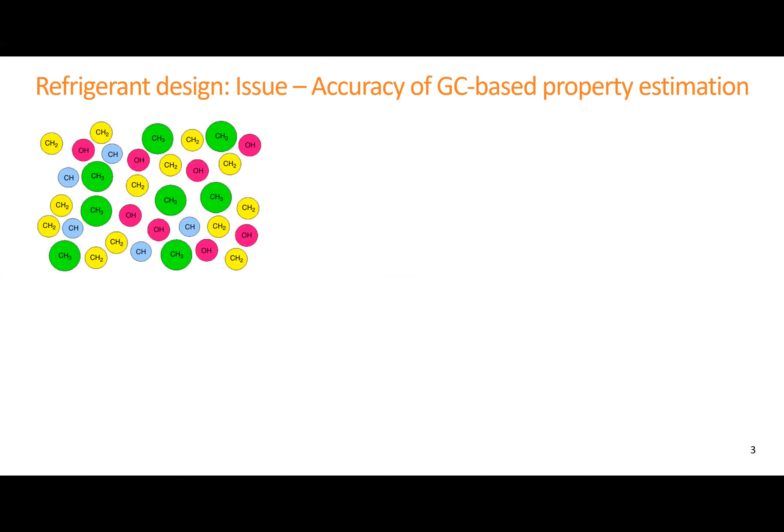As I said earlier, these are the groups that can be joined together to form molecules. Our view is that these groups are a little bit too big to make the small refrigerant molecules. One would just take those groups together and join them in terms of the free bonds of each of those groups, and then a molecule should not have any free bonds. With the groups that are available currently, those small molecules with chlorine, fluorine, or mainly fluorine, carbon and hydrogen are not possible to make.

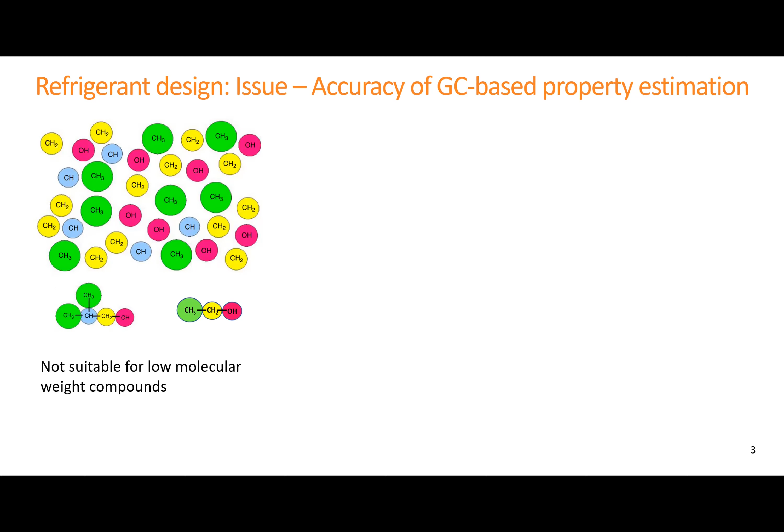And global warming, as I also said, actually depends on the data. If people have measured and have good confidence about them, then yes, we can fit them very nicely. But I'm not 100% sure of the global warming potential as well as the toxicity measures. There is big difference in the values, but we are not talking about very accurate values in terms of these properties. We are talking about that as long as we are below a threshold, it is all right.

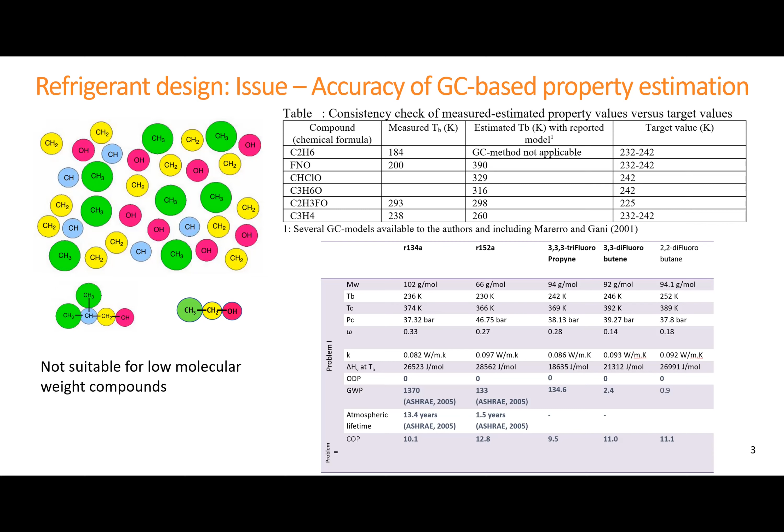So we started checking, or creating a new database of molecules. And when we checked the current database, as I said, there are not that many molecules. There are only 300 known refrigerants, and they're not wide enough for us to use them to develop new models and accurate models. And even for the 300 refrigerants, not all properties are measured for them.

So what we did was, as you can see here, with 1 carbon, 2 carbon, 3 carbon, 4 carbon, and then the bonds are listed. One carbon will have 4 bonds. And then we try to fill those 4 bonds with hydrogen, fluorine, chlorine, amine, OH, iodine, to see how many molecules we could generate. So examples, CH4, we fill all the 4 bonds with hydrogen, and then CH3F, CH2F2, like that. We manually did all of this. We did not use machine learning because we would have to create a program that the machine would understand. That would require more effort than just us doing it manually.

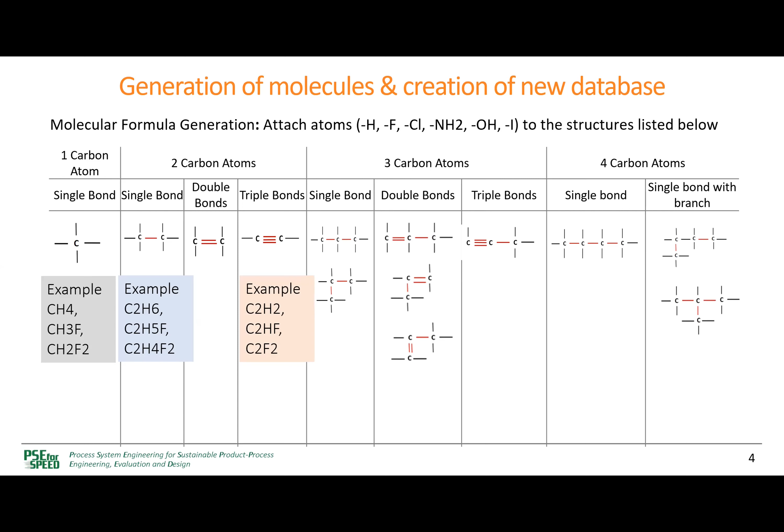So like that, we filled out all the bonds, all the combinations for single carbon, 2 carbon, triple bonds. I'm not showing examples for all of them, but all possible combinations, we looked at them, and we generated the molecules. This gave us a new database.

And then the new database, you can see with 1 carbon, 2 carbon, if you can see my cursor, the first column here has 8,000 compounds. These 8,000 compounds, we are sure it satisfies the chemistry rules, but they don't exist. What we have found is these molecules, around 3,500, they do exist, but properties are not found for them. Out of these, only 364 were found in our current database, which had property values. And another 65 had the same chemical formula in terms of atoms, but had different structure.

So this was the number of molecules for which we had data. These molecules exist, but data is, we are trying to collect data for them. They don't exist, these ones. In other databases, not exactly these compounds that we have generated, but small 1 carbon, 2 carbon kind of compounds, we found about 1,300 compounds. So then we created a database.

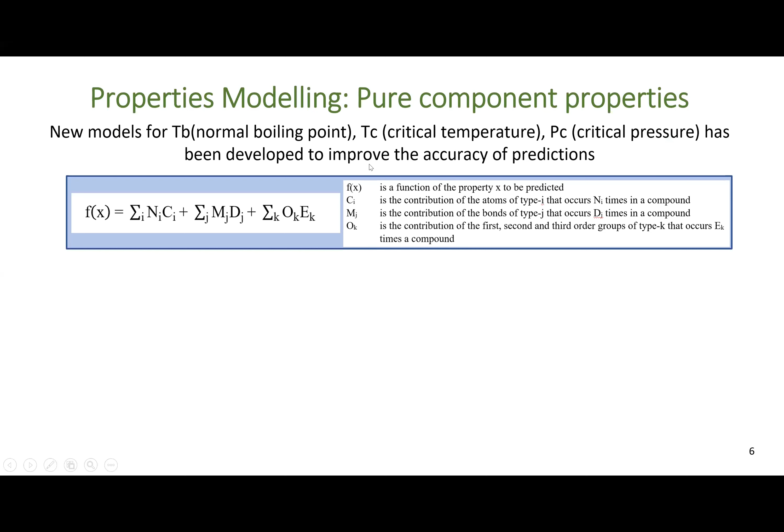So the new property models, we did the model for boiling point, critical temperature, critical pressure. The model looks the same as before, except that we have a different set of groups. And now we are able to get much better error.

Before we got so much error. We got mostly errors within plus minus 10%, but we needed plus minus 1% and 5%.

Now we have improved that, but we need even better than plus minus 5%, because if a boiling point is 210, 10% means 21 degrees plus minus. That is too much. We need to have within 1%, otherwise the simulation and performance is not going to be very accurate. So we still need to improve here to get it to 1%, but at least we have 5%.

And it's much better than what was before. So that's a new improvement.

But as I said, if one wants to use these groups and these methods, the generation of the molecule is already done because we have all the molecules. So all we need to do is calculate the properties.

But we have the model now. So what we need to do is go back here and calculate all these properties. We would not have the possibility to check how accurate they are, but at least we have a model to predict the properties.

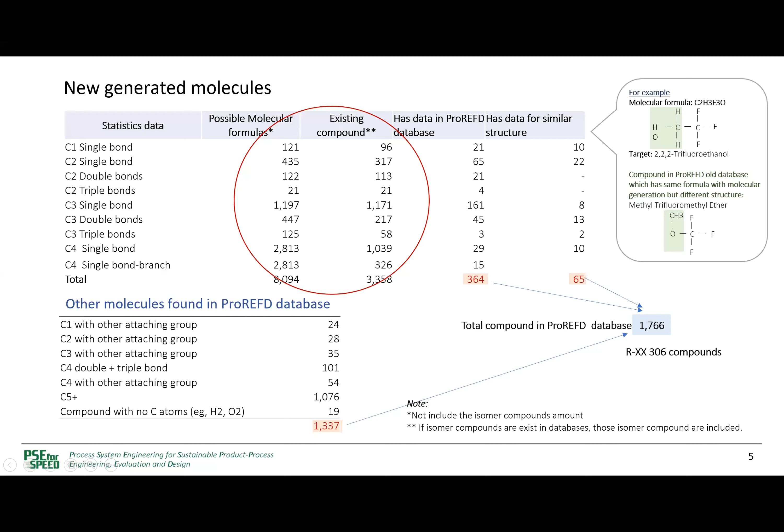And also we can find out exactly which molecules have larger than 10% error. Maybe the groups that we had defined, these small groups, were not good for these. So we are looking at how to avoid them and remove them. Or maybe there is an outlier. We need to check those.

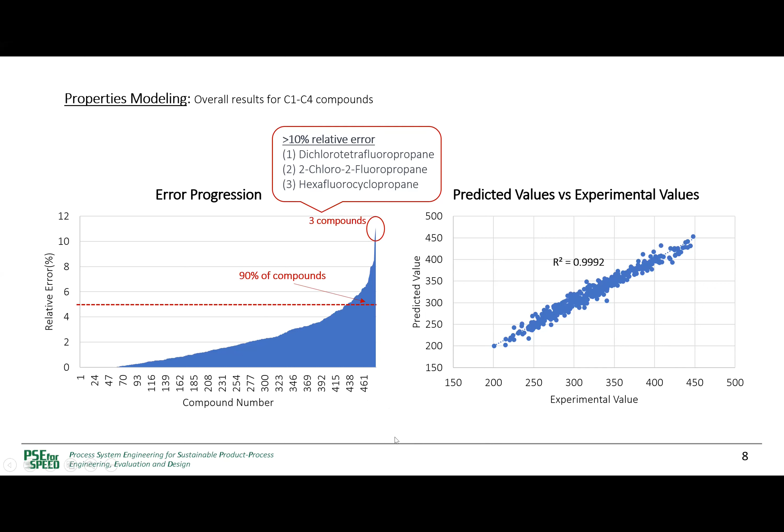And you can see that the number of compounds is not 1,000, it's less, because this is compound C1 to C4. So when we did the modeling, we reduced the compounds further to 1,016 because some of the larger compounds worked all right for the groups that we had.

So we are talking about two parallel methods now. One, the standard group contribution method, and one specialized group contribution method only for the refrigerant molecules.

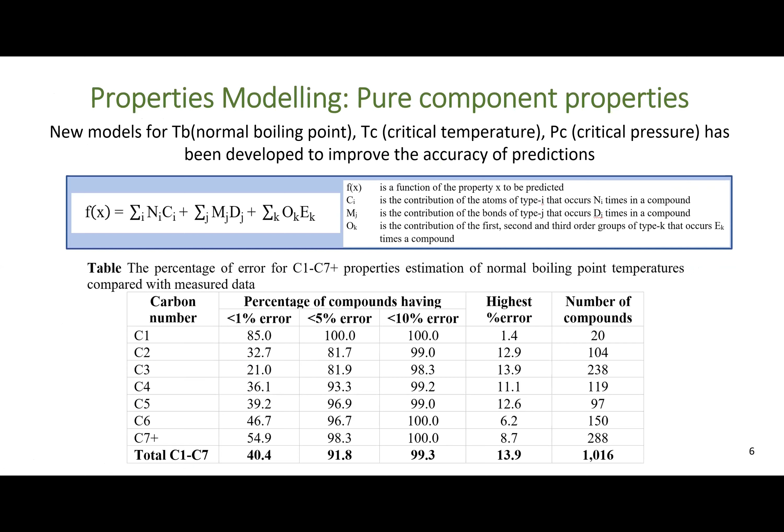So now we have the pure compound, but we are also going to look at mixtures because refrigerants as mixtures have been proposed. And the reason for that is if we want to satisfy several properties, it's unlikely that one molecule will satisfy all those properties. If we take mixtures, it has more chance of matching more than one property. So that's why mixture properties is very important.

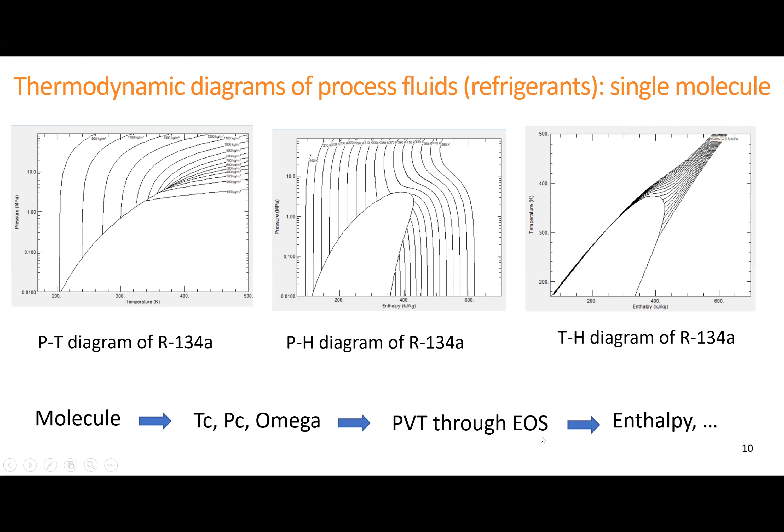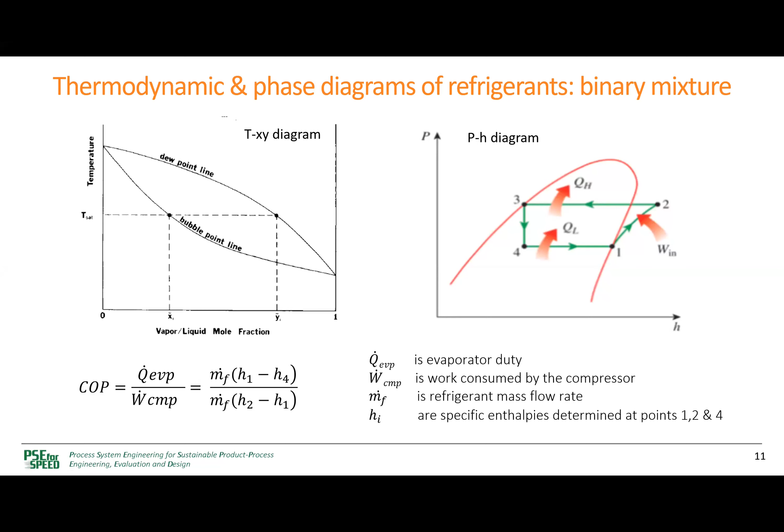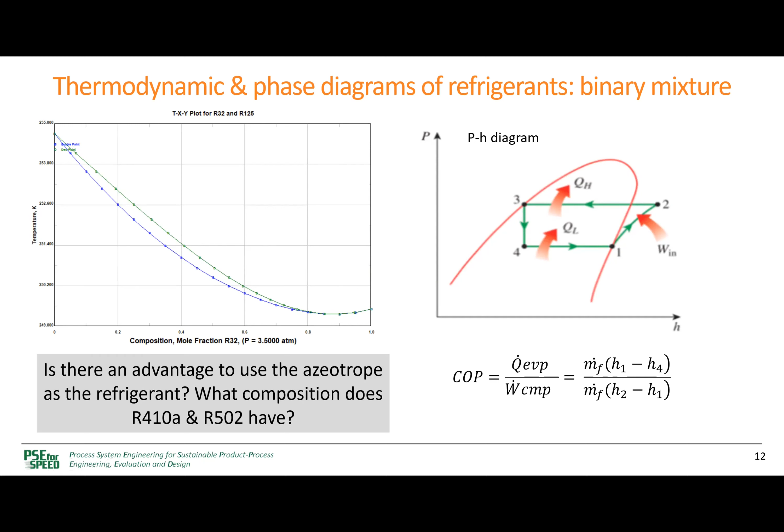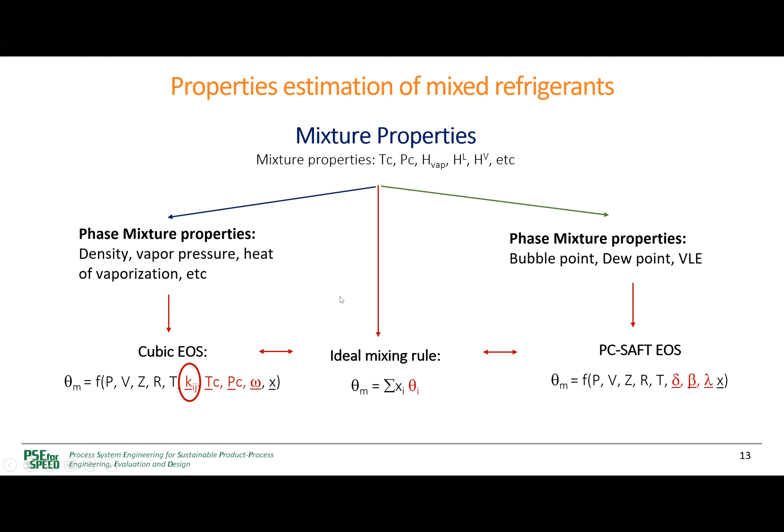If R, T, and P are given, VZ can be combined into one variable, and this can be predicted, and similarly here. Once they are predicted, the fugacity coefficients can be calculated, and dew point, bubble point, VLE, all of those can be calculated. Similarly for the density, vapor pressure, heat of vaporization, etc. So an additional complication is added when we want to handle mixtures.

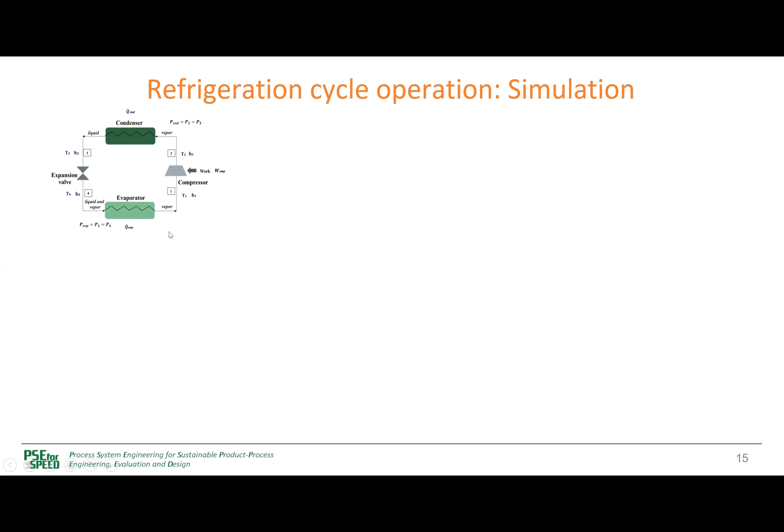So now simulation and sensitivity analysis. This is the cycle we want to simulate. We can choose whether it is a single refrigerant or binary, ternary, quaternary, quinary - so up to a 5 compound mixture can be handled by the model we have developed, because we calculate the PVT relationship and related data for whether it is a single compound or any mixture like that.

So step 1, you define the mixture. Step 2, give the composition and the mass fraction, mole fraction, all of that, and the formula.

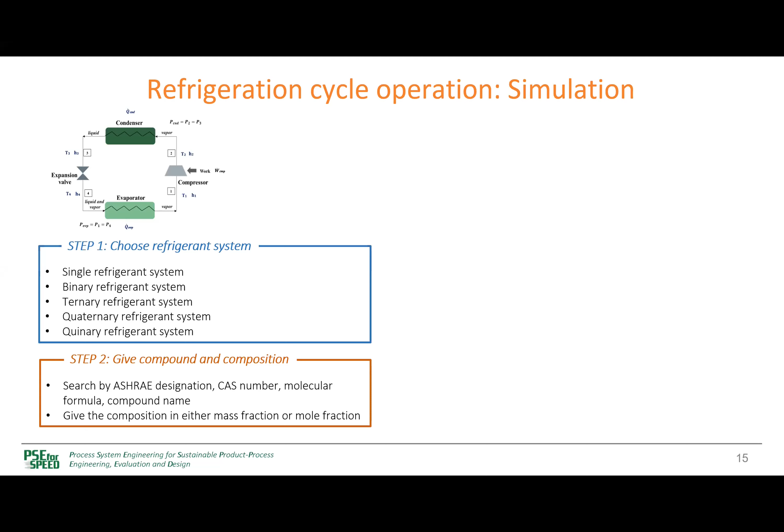Then the system will extract all the data needed, all the parameters needed, and then it will give you options to define the condenser - do you want to define the temperature and calculate pressure, or define the pressure and calculate temperature? These options are possible. Expansion, constant enthalpy, and other options are also possible. So then the user has to select those.

Based on the selection, the program will calculate the temperature, pressure, whatever is needed to calculate the enthalpies, work, and the heat duties, and then the COP. The results can be exported to an Excel file or saved for future analysis.

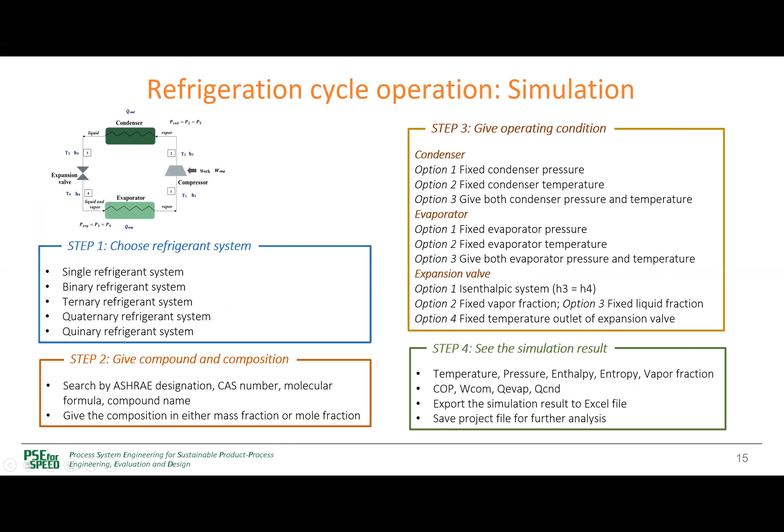It can also do sensitivity analysis, both of parameters as well as operating conditions. Parameters meaning that once we do step 4 and calculate the COP or the work or the duties, if we had plus or minus errors - let's say the uncertainty in the boiling point, critical temperature, critical pressure was plus or minus 5 to 10% - then how would the COP change? That kind of sensitivity analysis can be looked at, as well as what happens if I change the room temperature or the ambient temperature or the cooling water temperature, what will happen to the operation. So both can be looked at, and this is what we call sensitivity analysis.

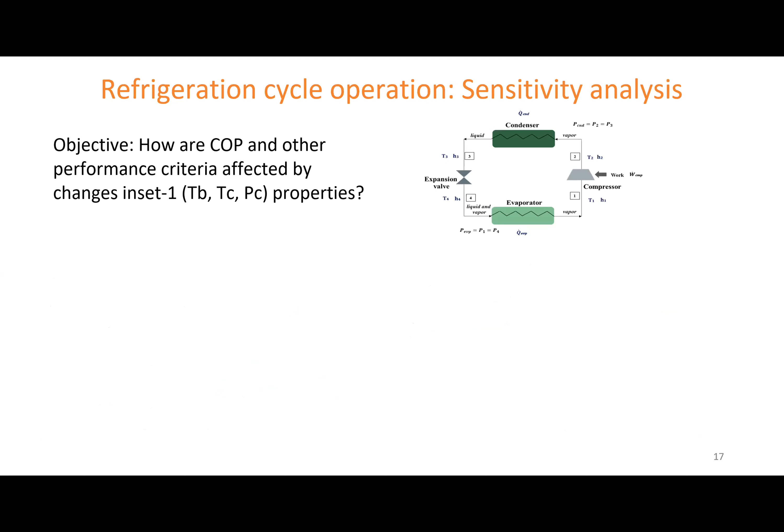So then, refrigerant selection - I'm not going through the models of the simulation because in lecture 1, I'd already given you how the enthalpy and the COP are calculated. So refrigerant selection: the objective is to find single compounds or mixtures that match a set of target properties and functions.

For a single compound, we will do a database search and CAMD that you have already seen. For mixtures, we will have to first identify a set of compounds which are candidates for the mixture, and then we will have to take different candidates and find out whether the compositions will match the target. Once they do, then we can select them for further analysis.

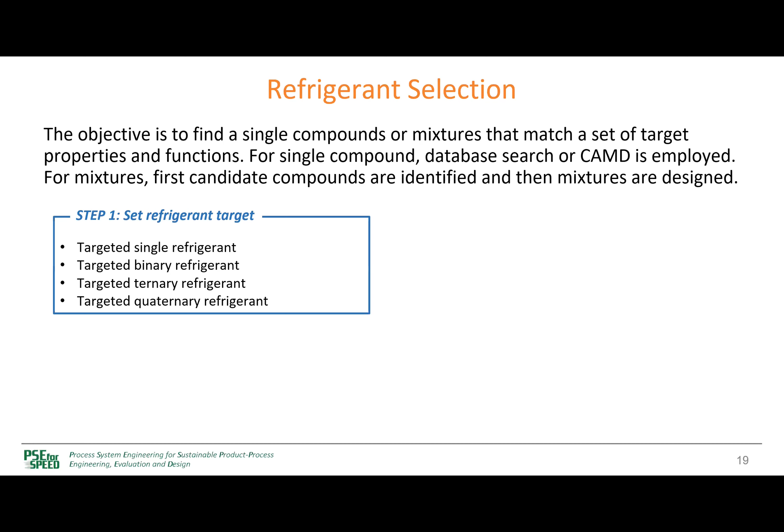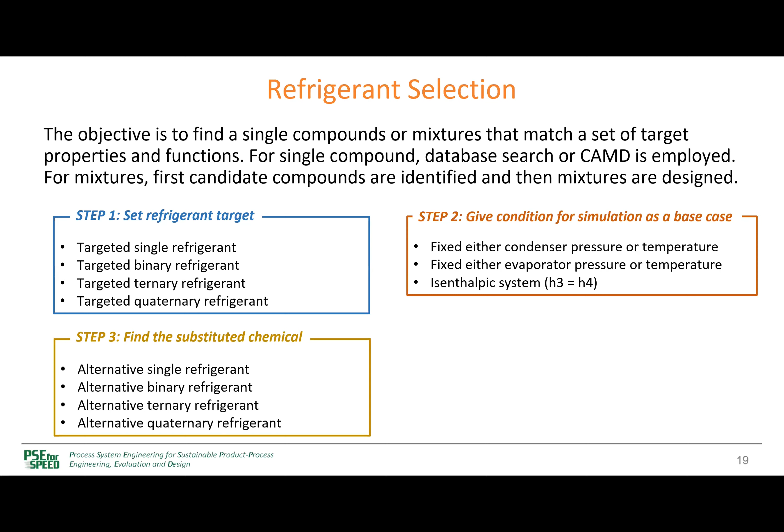In order to - I'm not showing now for the single compound, but this is also included - if we want to find a single refrigerant or a binary, ternary, quaternary, we have to set targets. Targets means what should be the property values. Then when we want to do the simulation, we have to choose the conditions for doing the simulation: what is the condition for the condenser, the evaporator, the isenthalpic expansion, and also for the compressor. Then we will find the alternative refrigerants, and you will see how it is done, and then we will do the calculations. So there are 4 steps.

So what kind of properties do we match? If it is a binary mixture, we have 2 compositions, but only 1 degree of freedom in the composition in terms of mole fraction, because X2 is 1 minus X1. Which means that if we take a binary mixture, then with composition, we can fit only 1 property - we can match exactly 1 target property. And since boiling point is the most sensitive property, we say if only 1 property needs to be matched, take boiling point.

If we want to have a ternary mixture, we have 2 degrees of freedom, so we can take 2 properties: boiling point and TC or PC. And if we have a quaternary mixture, then we have 3 properties: boiling point, TC, PC. Remember that we call this target property set 1, that we have to match these properties - TC, PC, omega. Omega is also not very sensitive, so we can ignore that.

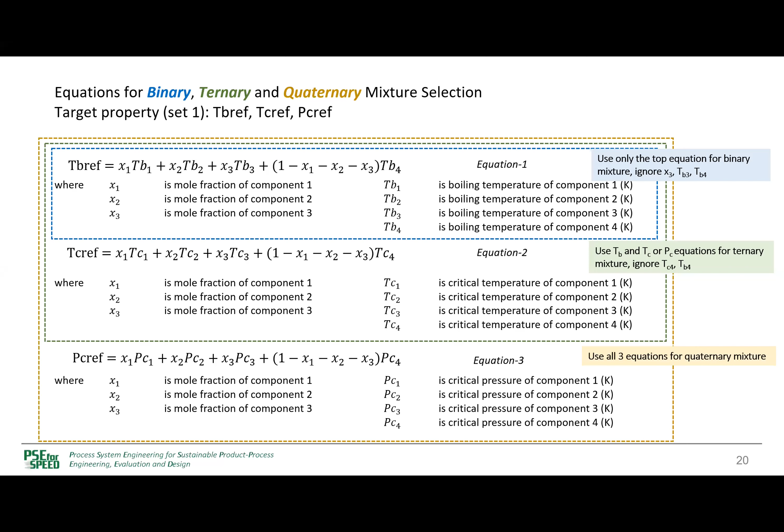If we define omega or critical pressure, we know what kind of PVT relationship we will get. That's why we say this set 1 target properties need to be matched with the mixture, and set 2 properties are global warming, ozone depletion, flammability, and all those things. Those are desirable properties, but not absolutely necessary—it would be good if those properties are good. So now I will show you with a case study.

Here we are replacing R143A, and we want to find single compound replacements, binary, ternary, quaternary. First, if we want to set up the target property mixture for boiling point, critical temperature, critical pressure, the equation is given. The R143A boiling point is 225, critical temperature 346, critical pressure 37. These are measured data, so we want to match exactly this.

If it is binary, we will match the boiling point. If it is ternary, boiling point and TC. If it is quaternary, we will match all three. And so the compositions we will get by matching this. Once we have compositions, we will calculate all the other properties and do the simulation.

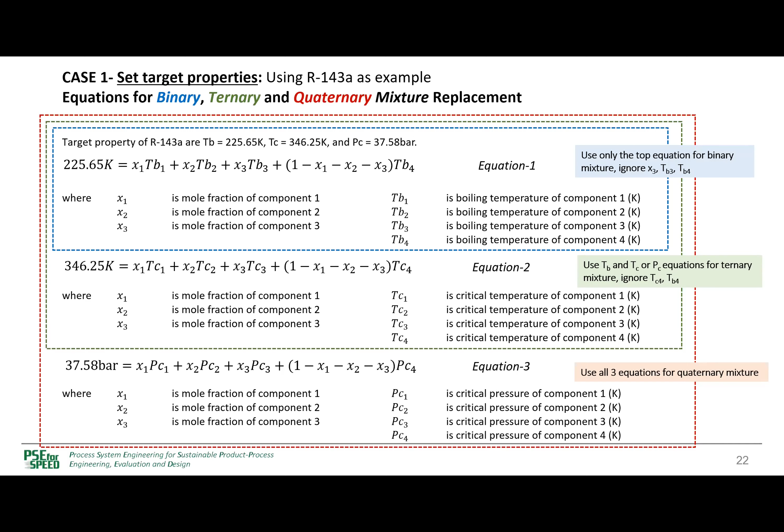The step in order to find the compounds, candidates, will already show you those things, and during the demonstration they will be showing you.

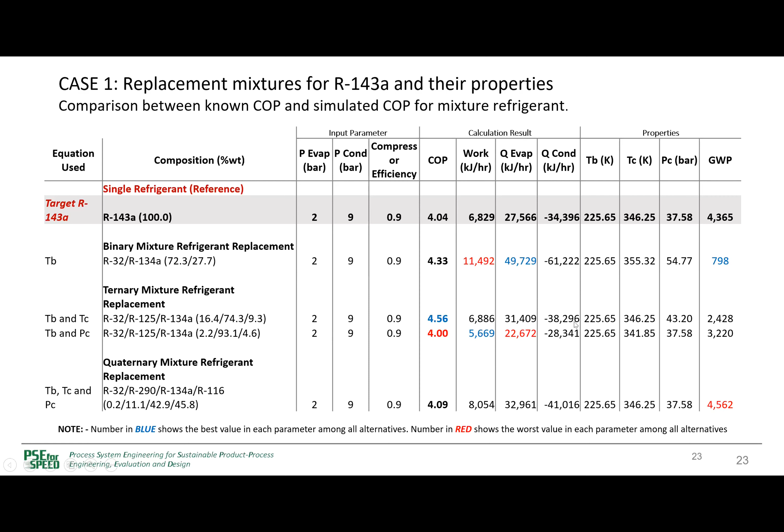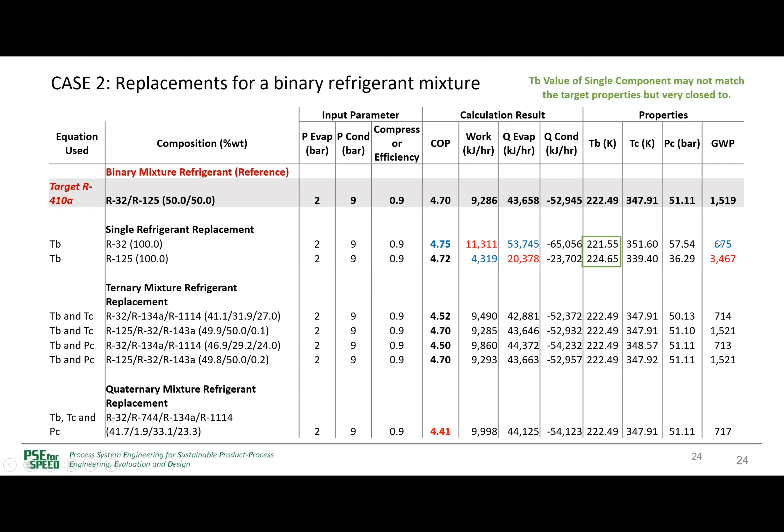The second example, case 2, is we have R410A, which at 83% forms an azeotrope, and at 50% it does not form an azeotrope. We want to replace it with a pure compound, single compound, ternary mixtures, or quaternary mixtures. It turns out that a single compound is quite good to replace this binary.

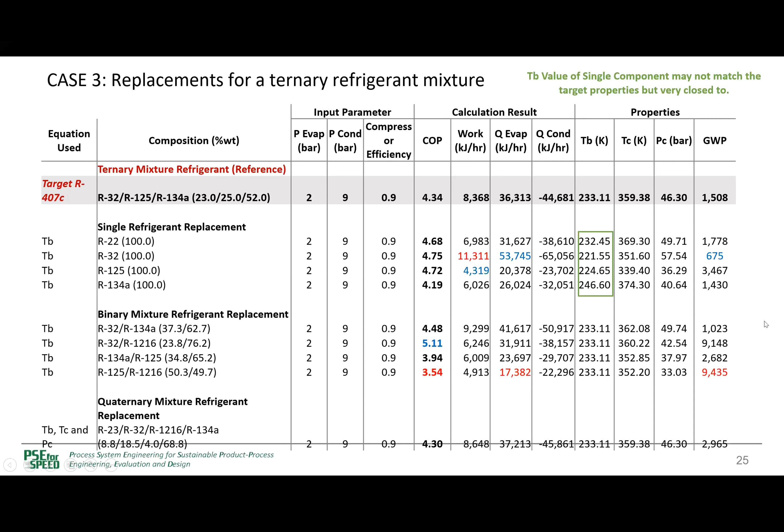The next one, we have a ternary target. Originally it is ternary. We have possible single compounds that can approximately give this, binary mixtures that can approximately give this, and quaternary. But you can see that this one, which has a good COP, the GWP is not good, while this binary is quite good, lower than this. But this one seems to be the best—just 32—seems to be quite good.

So again, what we can show is that it is possible to replace and find candidates that are worth looking at. More experiments need to be done, but these are compounds that exist. More experiments need to be done at those compositions to see if at certain composition and certain operating conditions they give the best results.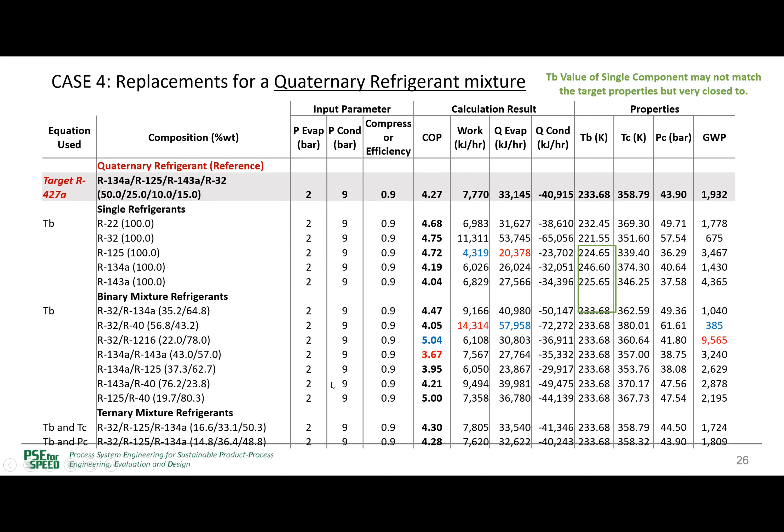The results are not shown here, but one can also take each of the best candidates and do sensitivity analysis - if the boiling point was different, from -5 to -15, or +5 to +15, keeping all other conditions the same, how would the performance change for boiling point, critical temperature, and critical pressure. The observation was the same: boiling point is more sensitive than TC, which is more sensitive than PC.

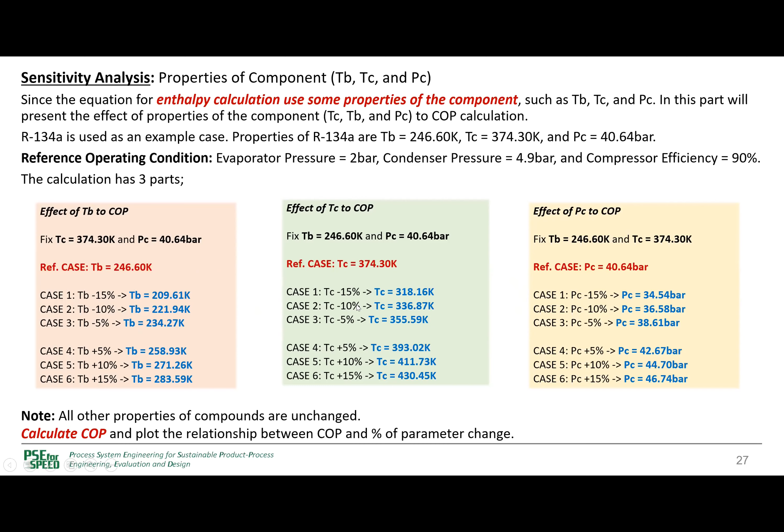If we increase the pressure, we actually get higher COP. So the expansion we do should not reduce the pressure too much - we should reduce it to a certain value. Compared to the base case, if we reduce it a little lower we get a better value, but we should not decrease so much. There will be a lowest value of the pressure, and we should keep it a little higher. So when we reduce the pressure in the expansion, we should not reduce too much - that's the message, and that will give higher COP.

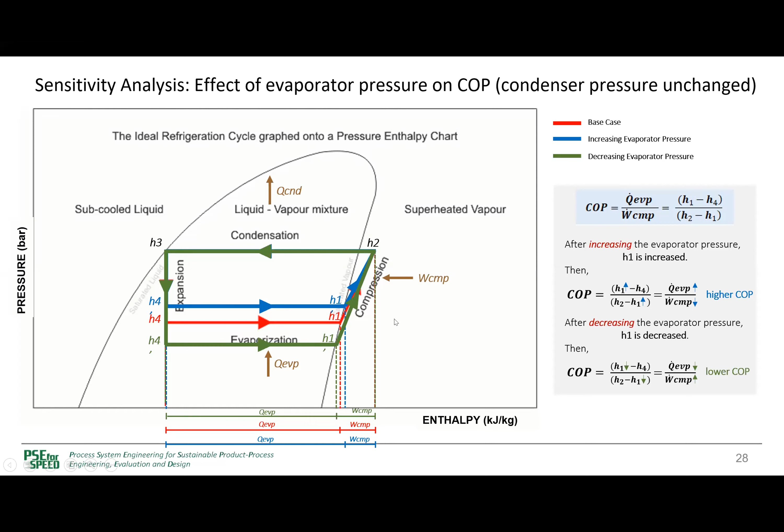So this kind of analysis can be done very easily on any candidate.

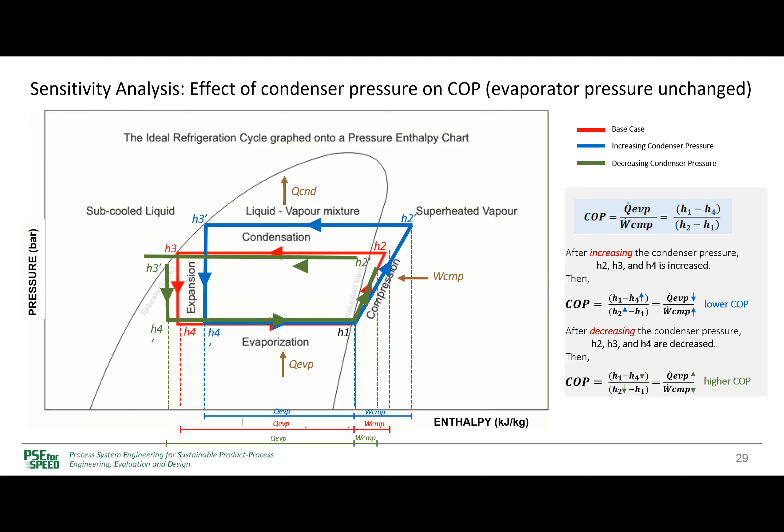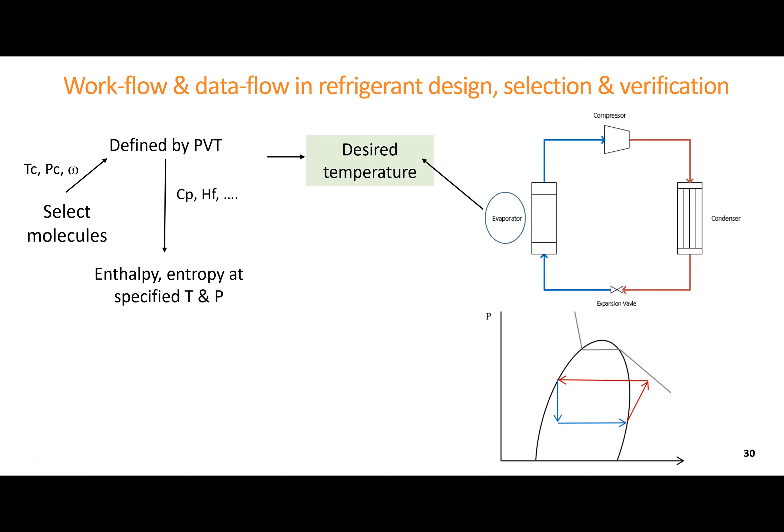I've talked about this already in the first lecture. This is the desired temperature we want to achieve, and by selecting a refrigerant we can define the PVT relationship needed for that temperature. The selected refrigerant will pass the critical temperature, pressure, and acentric factor for the single compound or mixture. Once we've generated the PVT, we can calculate enthalpy, entropy, and other variables, and then check the thermodynamic diagram, and also check with respect to fluid design, cycle design, and sustainability.

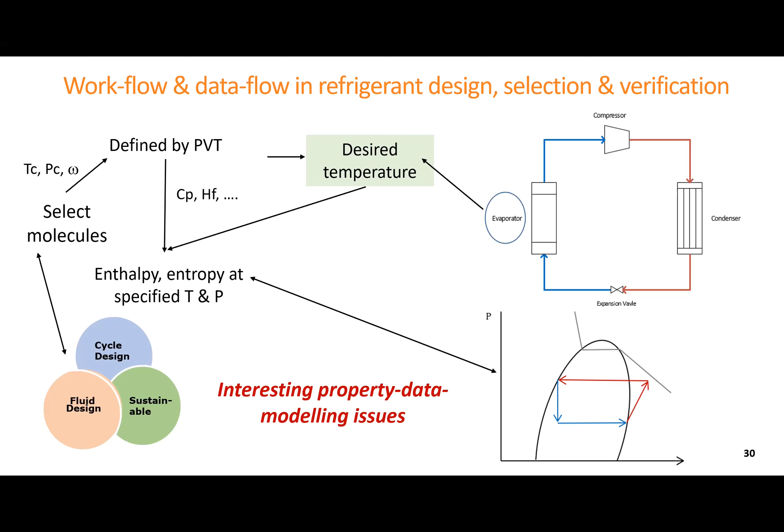What are the target properties? We define them here, and convert this problem definition into mathematical form in terms of constraints and objective function. Once we've formulated the mathematical problem, we need to solve it - that can be done by generate and test, by optimization as Sahinidis talked about, or by different ways - and then we have the result.

If we get more than one candidate, we can take those and do experiments to find out more. If we don't get any candidates, maybe our problem definition was too strict and we need to relax it. If we get too many, maybe we relaxed it too much and we can tighten it. So problem definition is very important with respect to whether we get a lot of results or not. Solutions of CAMD problems are therefore iterative - problem formulation controls the success.

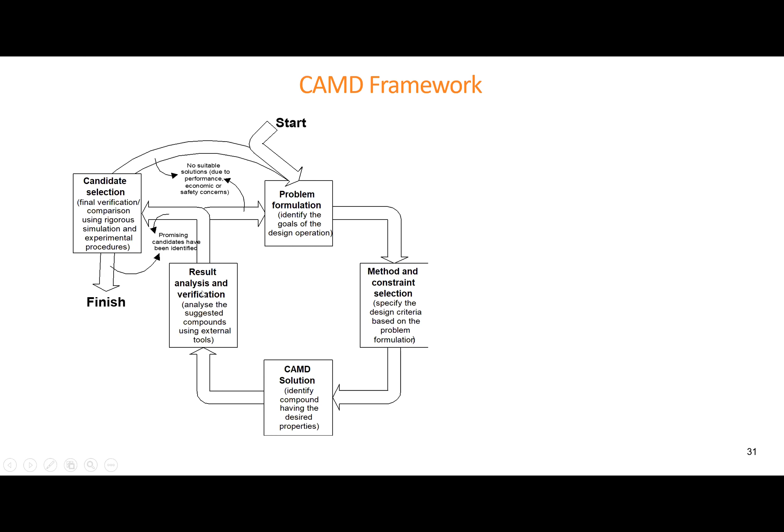Essential qualities versus undesirable qualities - which are the target properties we want to match, and which are the ones we do not want to match? Connectivity with external tools, data, and methods is very important, because at every step we need many different tools and they need to be integrated - that's why software is needed to do that. So internally, once the problem is formulated here, how is the problem solved?

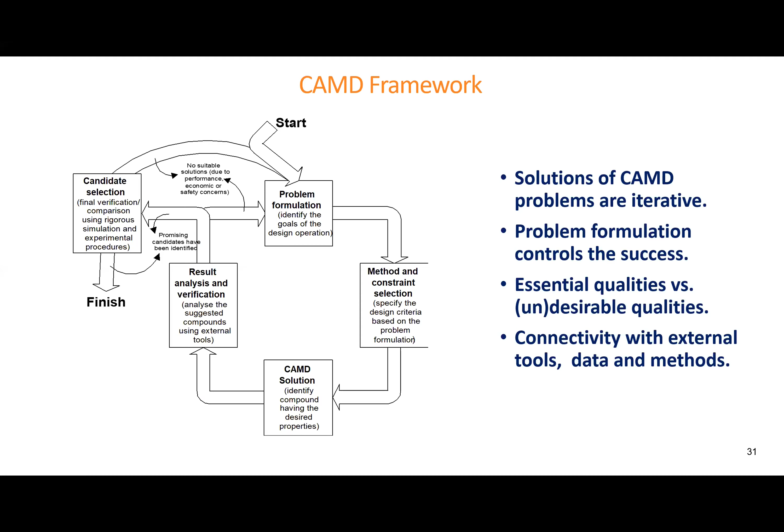We have different methods to solve it. First we define the problem, and when the problem is defined, it also goes to the database to retrieve all the data that it needs, not just data of the compounds, but data of the model parameters and all that. Then it formulates the problem mathematically. Once it is mathematically formulated, it can decide which way it wants to solve.

Will it solve as generate and test? Will it solve as optimization? Will it solve simultaneously? That is, design the molecule and design the refrigeration cycle simultaneously.

Depending on which method is used and which problem is formulated, the data needs will be different, and these will be shown here. What you see on the left-hand side are the tools needed. What you see on the right-hand side are the data that is needed from here to here to here. As we go along from top to bottom, more and more information comes into the system. Here are the 4 steps that are needed: definition of the problem, mathematical formulation, formulation of the CAMD problem, and solution of the CAMD problem.

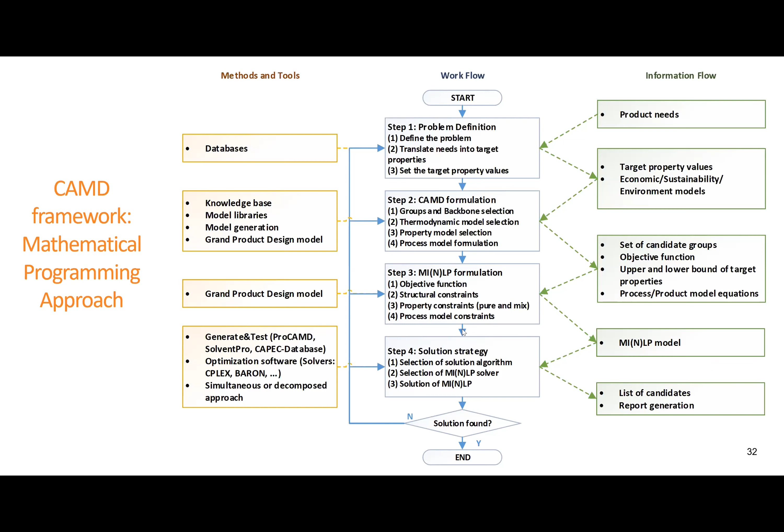Modeling will not be shown today. It will be demonstrated in webinar 6. Refrigerant selection and refrigerant cycle simulation will be shown today.

What can be done in future? Increase the database contents. As I said, we have more than 10,000 generated molecules. We want to add them, but we don't want to add them with no data there. We want to add them with estimated data and cross-checked if possible. At this moment, the specific refrigerant database has about 1,700.

Then we want to improve the property estimation, both for pure compounds and mixtures. We want to continuously improve it. We want to fill in the gaps in the measured data. There's a lot of gaps. We want to add new features for cycle simulation.

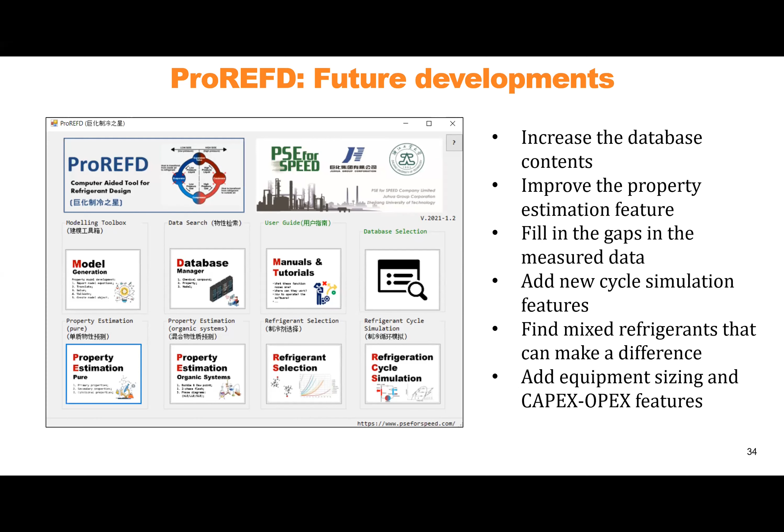Conclusions and perspectives: a further improvement in solution strategy, simultaneous design of refrigerant and optimization of refrigeration cycle, taking into account safety, environmental, and health concerns. Add features to allow organic Rankine cycle, heat pumps, cascade operations, etc.

How to fill out the properties for approximately 10,000 molecules that we have generated. Once we have filled this out, the molecular generation part of CAMD will not be necessary anymore. Perform a detailed sustainability, LCA, and profit analysis for most used refrigerants and suggest how they can be improved. Add uncertainty issues to the design problem solution.